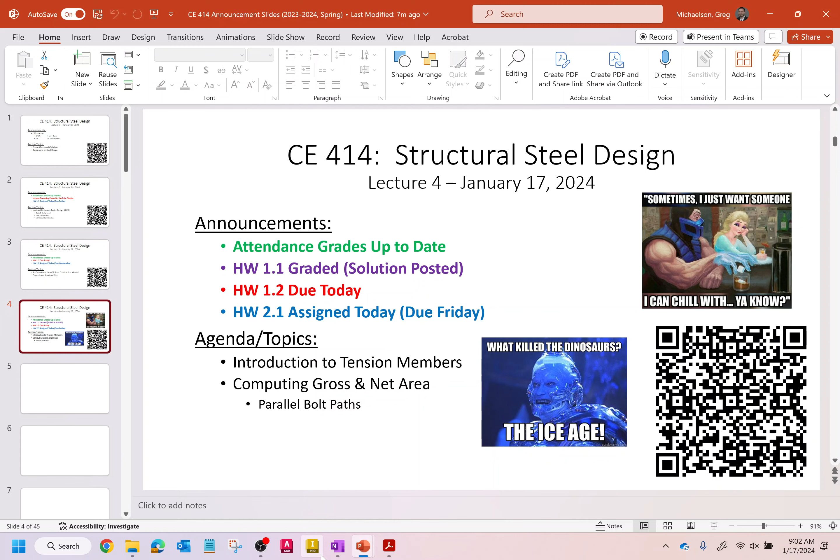But today, what I want to do is actually get into some steel design. Our first real foray into actual steel design begins with tension members. Let me pull this up and let's get started. Our goal for today and the next couple weeks is the assessment of a particular type of member in steel design — namely, any element that is loaded in pure tension, like taking a piece of steel and yanking on it. Where would you find these in the real world? In trusses, in the tension elements of a truss, and in braces in buildings. Those are the two main places you'd find them.

Now, I'll blanketly admit that of common elements in buildings, like beams and columns, tension members are — I don't want to say the least common. I think just about every structure probably has some form of a tension member in it. But there's a reason we're starting with tension members: I want to begin teaching you all the process of design, so we need to start somewhere. Tension members, by their very nature, are fairly easy to design, or at least fairly easy to understand how they're designed. More than that, I want to teach you how to start using the manual. If we started with something like beams or columns, not only would we have to learn how to use the manual, but the math and design process would be trickier. Let's start easy and work our way up. Tension members are a very natural place in steel design to start, so that's where we're going to begin.

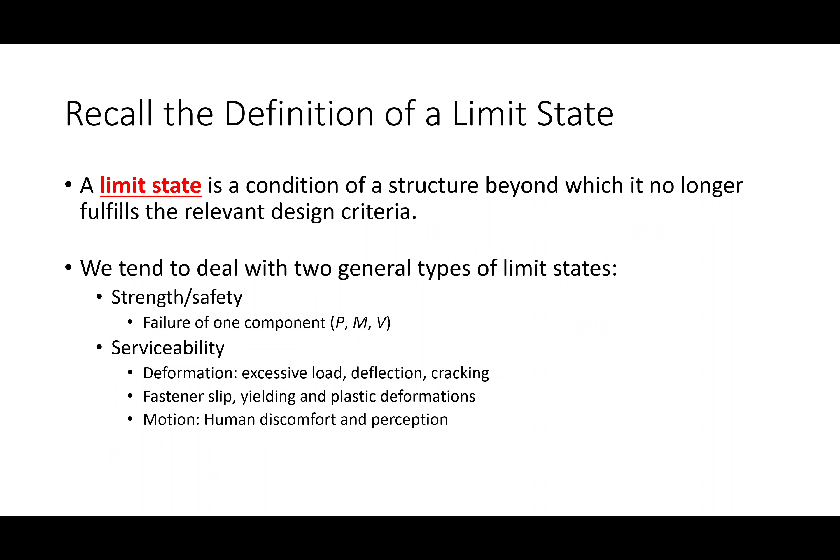That's gross section yielding, net section fracture, and block shear rupture. But we're going to take our time on how to compute those, because there's a lot that goes into the background on how to compute these, and we need to take our time understanding that. So what we're doing is we're looking at members subjected to axial tension. This is our goal for the next couple of weeks.

Again, they are among the most basic type of structural elements. One reason why I say they're basic is the difference between elements in compression and elements in tension: elements in compression have a tendency to be unstable. And elements that are in compression like to do this thing called buckling.

I think you've probably heard that term buckling before, maybe in mechanics of materials, but you have a column, you put load on it, and it gets sort of wobbly, and it suddenly kicks out and deflects. That sudden failure under compressive loads is called buckling. Tension members don't really do that, so the mechanics tend to be a little bit easier from an analysis and design standpoint.

So I'm going to bring everybody up to speed on probably a very fundamental formula that everybody's familiar with: sigma equals P over A. So what is sigma equals P over A? It is the stress that you get from an applied load over a given area.

So you fluid folks think of things in terms of pressures. Solid folks think of things in terms of stresses. But when we're assessing whether or not an element fails, we tend to not originally think in forces — instead of looking at a force, it's a force per unit area.

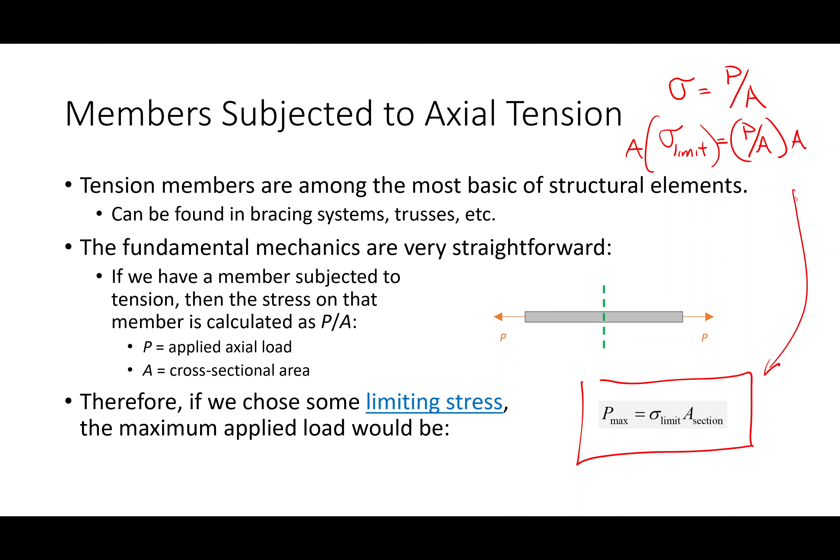But again, I'm really trying to make the point that this is really easy. You have a bar, you limit the stress, it's got some area. The maximum load you can put on that bar is whatever the maximum stress is times whatever the area is. So let's talk about those areas a little bit.

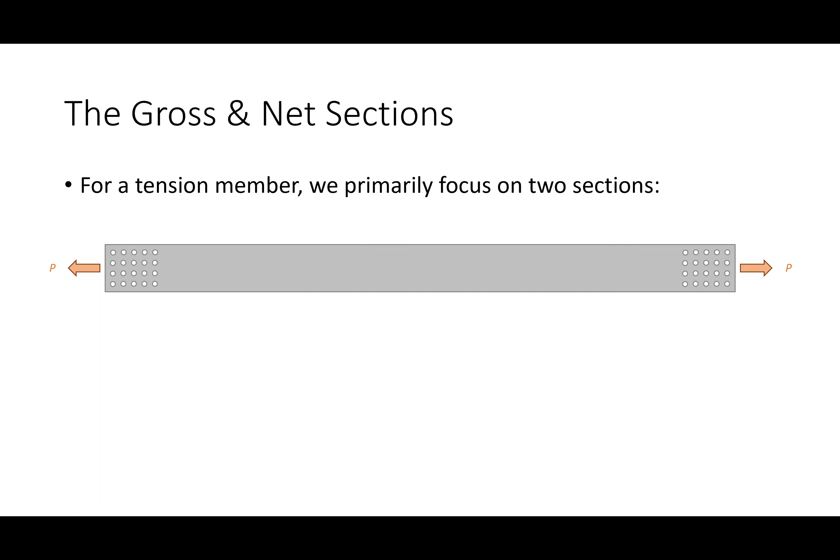Whenever we're looking at a tension member, we tend to focus on really two key areas. Now, you all have heard me say this before, that the secret weapon of structural engineering is a samurai sword or a lightsaber if you happen to be a sci-fi fan. So what we're talking about is important sections through this member for which we limit stresses.

Now, the first section is what we call the gross section. The gross section is just a fancy term for the main body of the member. So if you ever look at any tension member in the real world, you're going to see the ends of the member have some sort of connection to whatever it's connecting to, either through bolts or welds, or if it's an older structure, maybe rivets.

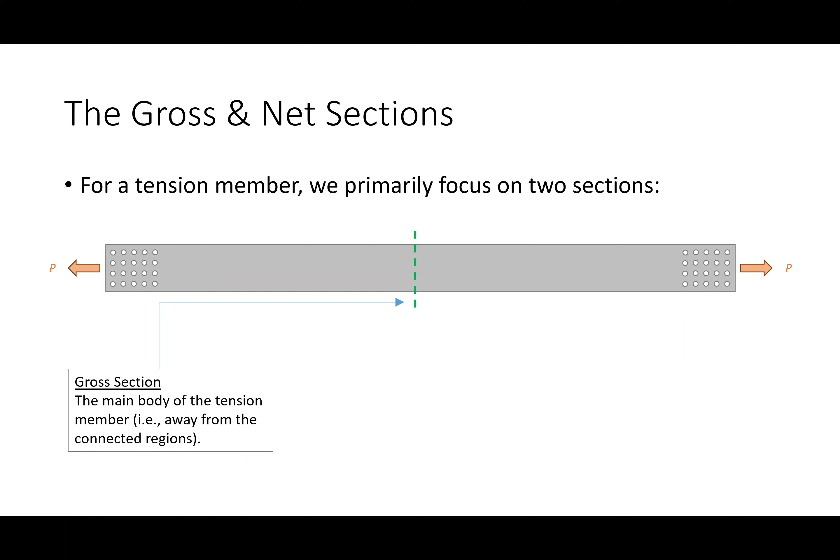We don't really use rivets anymore these days—I'll talk about that when we get into connections later. The ends of the member have bolts or welds, but the main body of the member is pretty prismatic. Any section away from the connections is pretty uniform, and we call that the gross section. The net section is the cross section that passes through the connectors.

A couple notes: I've drawn the net section here on the right. Tension members are usually symmetric, so whatever's going on over here tends to be the same as over here—especially with tension members. In other words, if I evaluate the capacity right here, I don't need to evaluate it again elsewhere. It's all the same.

I've drawn this section through a very particular line—it passes through the lead line of bolts. I'm going to be a little fast and loose with this term today since it won't really affect the connections we look at today. But when we come back Friday and start looking at staggered connections, the lead line will be more important.

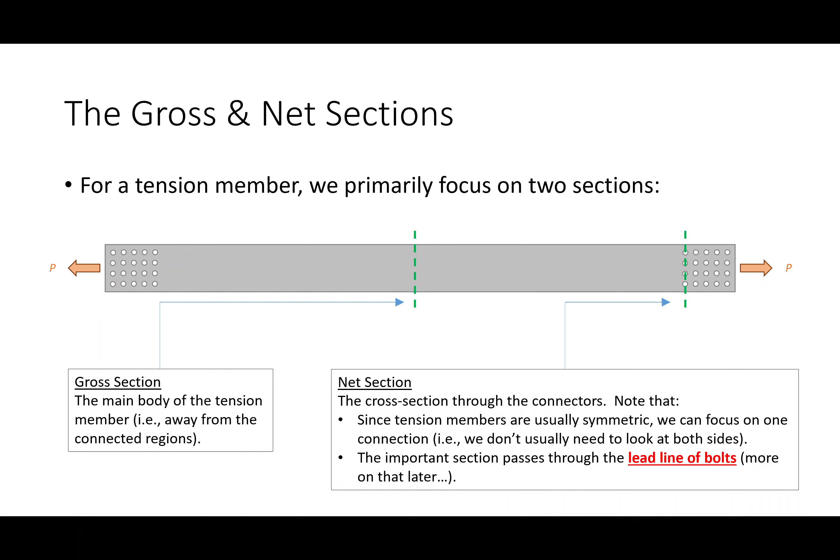I want everybody to open their manual—I know everybody brought their manual today, the big old AISC steel construction manual. Everybody brought their manual, right? I'm looking at the folks who didn't, and I'm just going to point at you.

I want everybody to turn to chapter D. I know some of you might still be waiting on it in the mail. It starts on page 16.1-32. If you don't have your manual with you, try to spy on somebody's next to you.

This is the section of the specification that governs the design of tension members. I think it's worth looking at to get up to speed with how specifications are written and what they look like. It's really easy to wrap your head around—this is a very simple chapter. I've included some snapshots on the slide. Section D begins with an outline of the chapter, then section D1 talks about slenderness limitations, which I'm skipping for now since we'll cover that later.

Let's get into section D2, which tells you how strong your member is. Basically, you can use this to predict how much load a tension member can withstand, and as long as the load is smaller than these numbers, the member is safe. It says the design tensile strength and the allowable tensile strength—the difference between the two is whether you're using LRFD or allowable strength design. These omegas are just factors of safety. Remember, allowable stress design lumps everything into one big factor of safety, while LRFD factors the loads and the resistance separately. So this is what we're going to use.

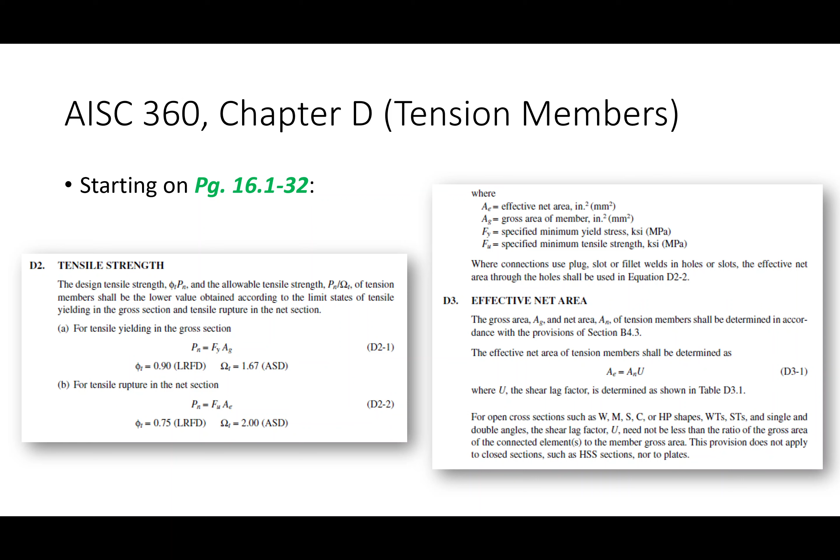So what am I talking about here? I'm going to give you a conceptual formula for gross and net area, and then we're going to refine it later. If you remember, gross area is the main body of the member, and net area is where the connection is. So how do we relate the two?

In general, the net area is the gross area minus however much material you remove because of bolt holes. That's a real simple way of defining it. I'm going to add some more science to this over the next couple of lectures, but in general, this is how you relate gross and net area: the net area is the gross area minus however much material you remove due to the presence of bolt holes.

So for example, if you had a member and you just welded the two together, like maybe with fillet welds, then the net area and the gross area would be equal because you're not taking any material away. Does that make sense? Everybody okay with that?

Now we need a more specific formula, but if we wanted to compute the net area, we need three things. We need the gross area, obviously, because in order to compute the net area we need the gross area minus whatever. We need the thickness through whatever plate material we're going through, and we also need the diameter. Notice how I'm being a little fast and loose with the diameter here. Let me sort of explain.

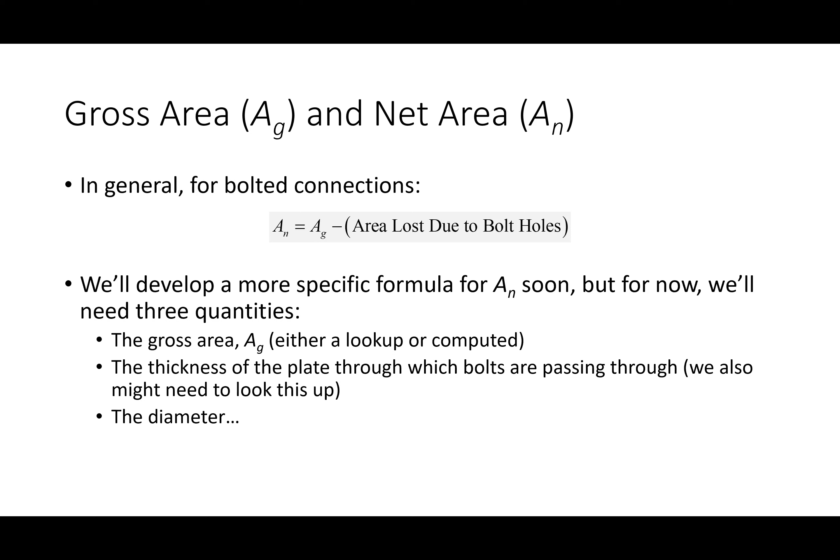Now whenever we compute net area, we're not really interested so much in the bolt diameter as we are the hole diameter. And there is a difference between the bolt diameter and the hole diameter.

How many in here have ever done any work, like in a mechanic setting, worked on your car, your parents' lawnmower, anything like that with a wrench? If you ever try and take a 1/2 inch diameter bolt and stick it through a 1/2 inch diameter hole, it doesn't work. The hole itself actually needs to be drilled slightly larger in order to facilitate fabrication or erection. You have to actually have the hole a little bit larger than the bolt.

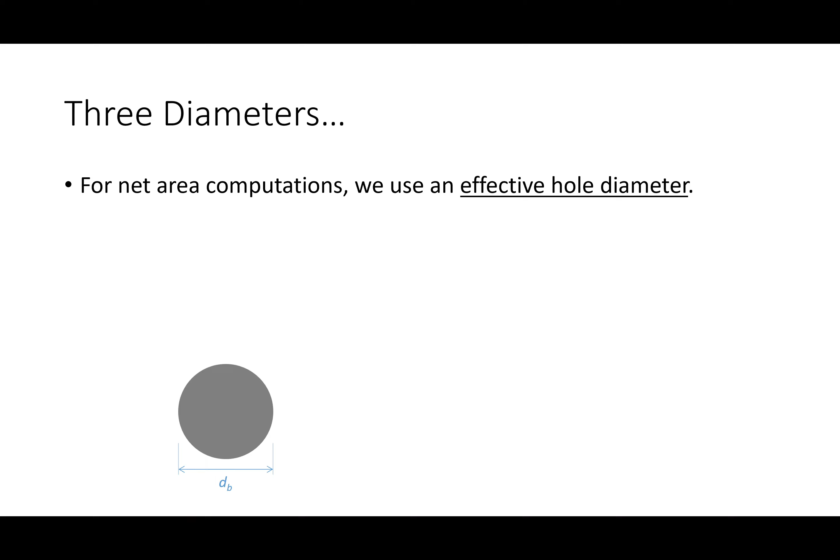So for example, let's say this is a bolt. I'm actually going to drill the hole a little bit larger. Now, that actually comes from a different section in the manual, Chapter J, the section on connections.

Chapter J says that if you have a standard size bolt, standard size hole, for any bolt that's less than 1 inch in diameter, which is most structural bolts that we use in steel design, or at least the most common, we add 1/16 of an inch to the bolt diameter to account for what we call erection tolerance. So erection tolerance basically means that we drill the hole a little bit larger so it can actually put the darn thing together. So if you have a bolt that is 3/4 inches in diameter, you add 1/16 of an inch, and that's your proverbial drill bit that you use to actually drill the hole for a standard size hole.

Now, to this diameter, we then add another 1/16 of an inch to account for the fact that if you've ever seen drilled steel holes, that little bit of material right around where the drill punched through, depending upon how it's drilled, can be a little damaged.

So the idea is that from a net area perspective, we don't count on this little lip of material, this 1/16 of an inch, being effective in transferring load to the rest of the member. So if the bolt diameter is 3/4 of an inch, to get the effective hole diameter, we add 1/8 of an inch to that. We're adding 1/8 because we're adding 1/16 twice: one accounts for drilling the hole larger to facilitate erection, and another 1/16 accounts for the fact that this damaged material isn't effective in transferring load. Does that make sense?

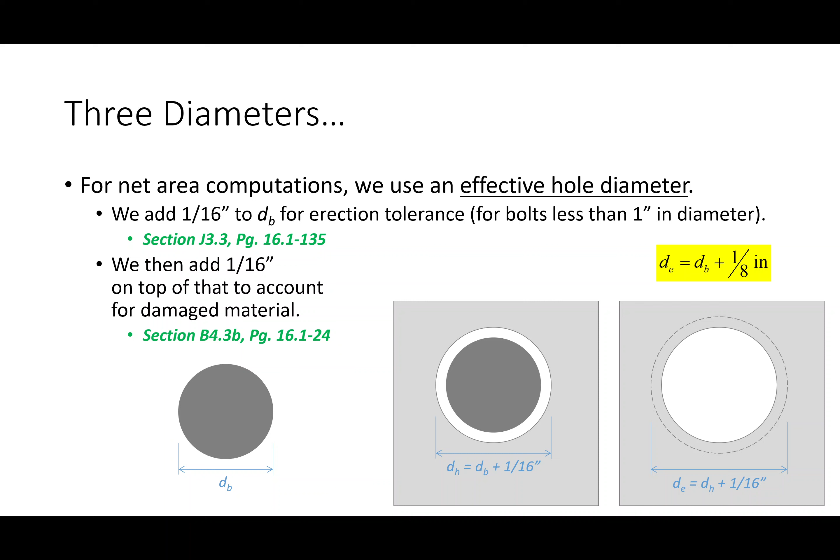So don't worry, we're going to practice this in a bit. We're going to employ this. For us, the effective hole diameter is taking the bolt diameter and adding 1/8 of an inch. So far, so good?

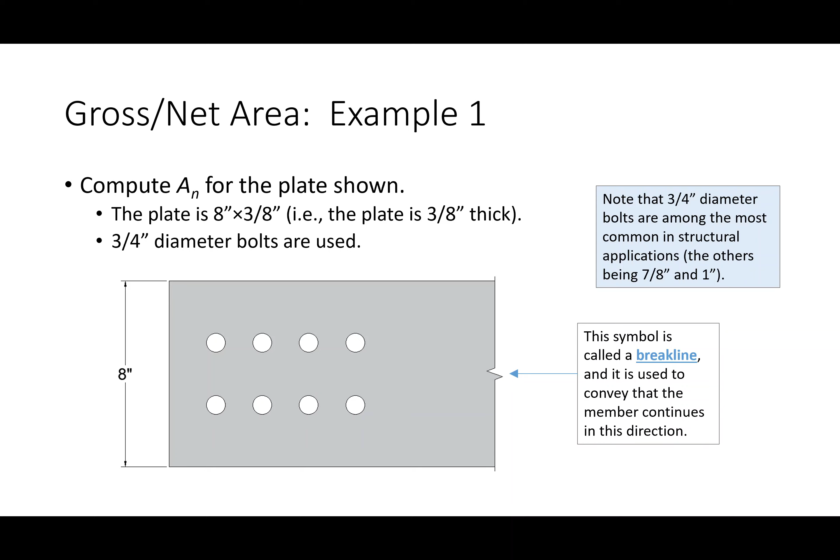I think the best way to go through gross and net area is to just do some problems. So let's do some problems. Let me pull this up here and get my keyboard out of the way. All right, so I have here a problem.

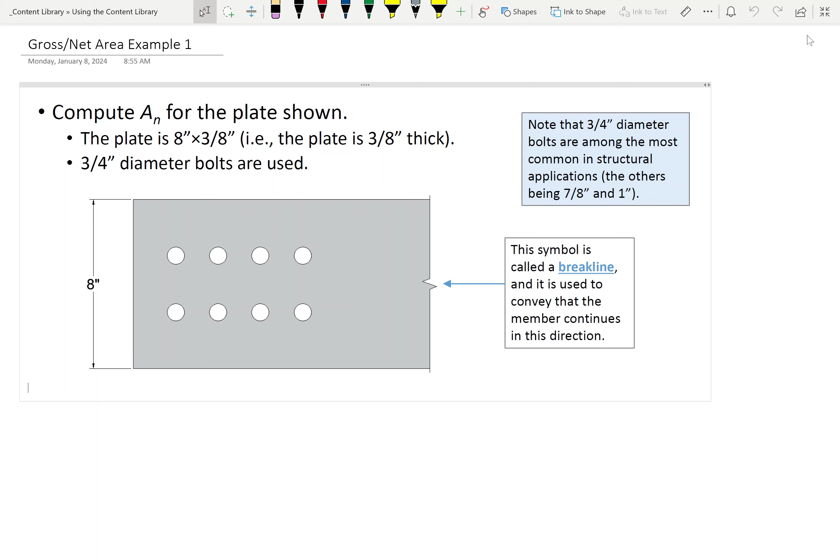We're going to compute the net area for this plate shown. I have some info about the plate: it's 8 inches by 3/8, meaning it's 8 inches wide and 3/8 of an inch thick.

We have 3/4 inch diameter bolts here, and 3/4 inch is the most common structural bolt used in the United States. It is the most ubiquitous, with 7/8 and 1 inch being the others. In building design 3/4 inch shines above and beyond, but in bridges you might see 7/8 and 1 inch more commonly because of the nature of fatigue, where you might need more bolts.

The other thing I'll mention is this little symbol here is called a breakline. Whenever you see this, it means the main body of the member continues this way, so the gross section of the member is out here. While this doesn't really matter for today's examples, it will matter a bit on Friday when we deal with staggered connections. Does that make sense?

So what we're going to focus on is computing the area through this section here. In order to do that, we're going to do a couple of basic computations. Remember, we said that the net area is the gross area minus area lost due to bolts.

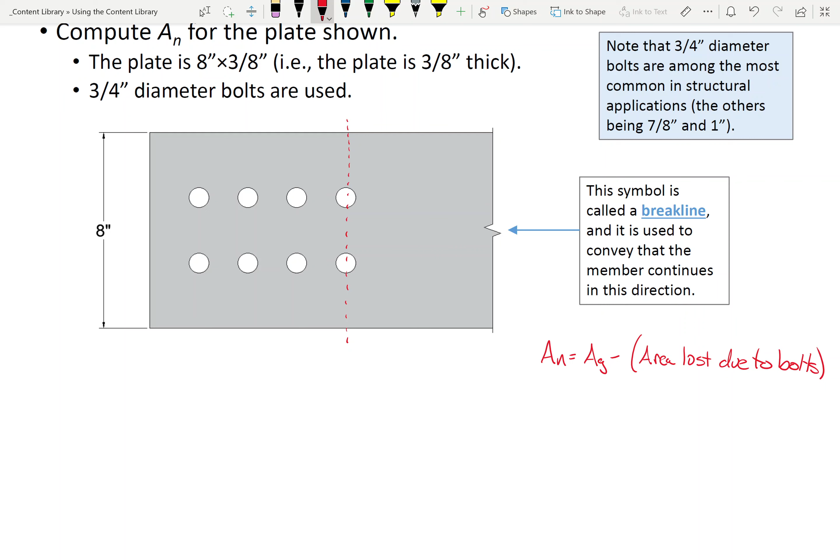And I see here some folks with some calculators, I might need your help on some of these calculations. So the first thing I'm going to do is compute the gross area.

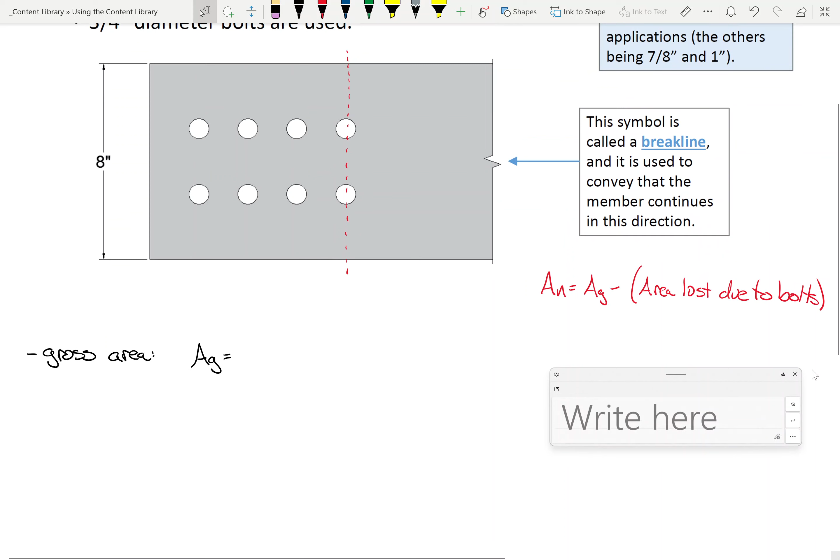So the gross area is pretty easy: A_g equals what? How do I compute the area of this plate? I'm asking you. Let me scroll up a little bit to make sure everybody can see this. So how do I compute the area of this plate if it's 8 by 3/8? I promise it's not a trick question.

What is the area? It's 8 inches wide and 3/8 of an inch thick. Just multiply them, right? So all we're going to say is that this is just 3 inches squared. That should be pretty easy, right? That's not very difficult.

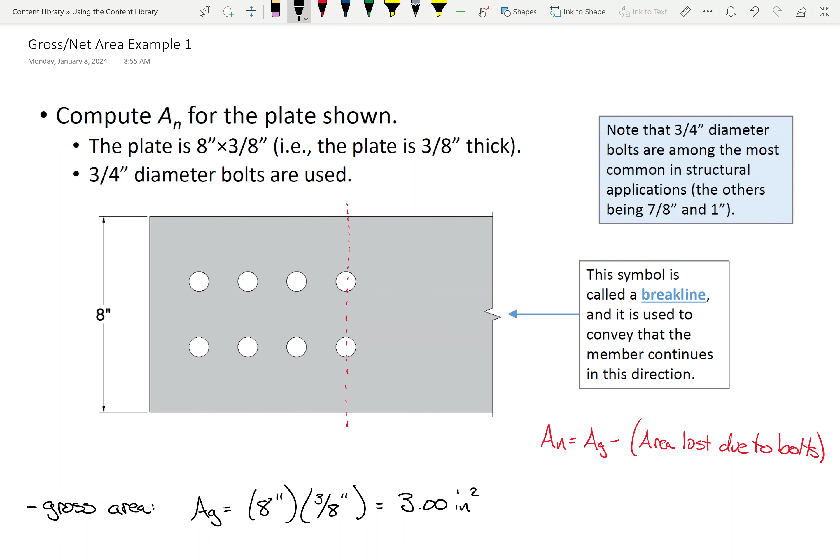Now, before we start talking about net area, let's look at the bolts. We were given that the bolt diameter is 3/4 of an inch. So if that's the case, what's the effective hole diameter? 7/8 — we add 1/8 of an inch. So far, so good? All right.

Now I need to remove the area lost due to the presence of bolts. Here's the kicker: what's the area of a bolt hole? How do I compute that? If I have a bolt diameter, how do I compute the area of that bolt hole?

Okay, a lot of people are thinking pi r squared, right? That's a good guess. That's wrong, okay? And everybody's like, why is that wrong?

Let me explain. What we're doing when we compute gross and net area is we got to think 3D. We're thinking samurai swords or lightsabers, okay? So we are samurai swording through this, and we're looking at the area. If you look at this in 3D, here's what it looks like, something like this.

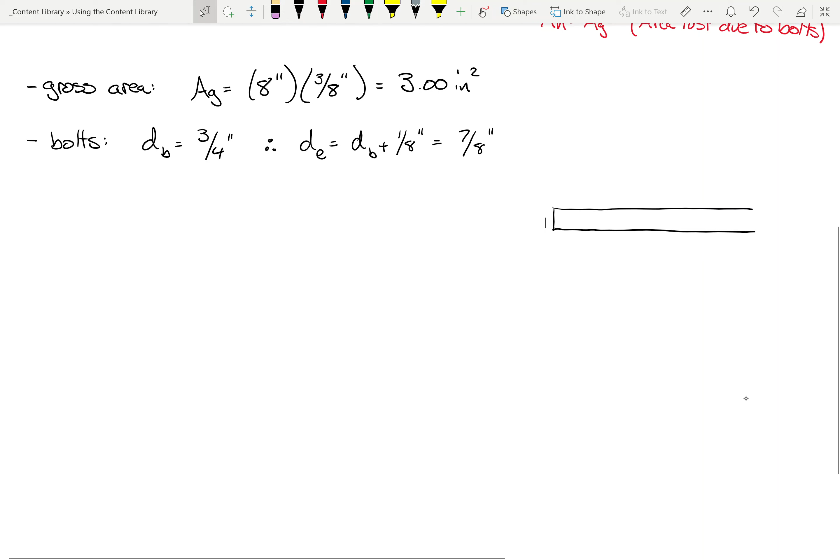So here's our plate, right? And so what we're doing is, here's a hole, here's a hole, here's a hole, here's a hole. And then what we're doing is we're cutting through where those holes are. So the area that we're removing is that, right?

Let's think dimensionally, okay? This dimension here, three-dimensionally, that's 3/8, right? This dimension here is 8 inches.

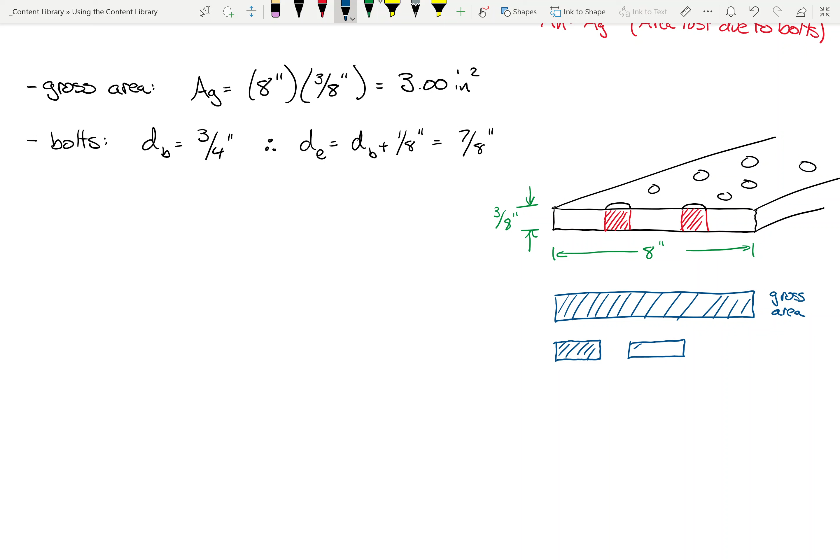Okay, so if I just look at the area of this rectangle, that's the gross area, right? So just to put some pictures to it, like this right here, that's the gross area. But this, that's the net area. And the reason is that what I have done is I have removed these chunks, right?

So my question to you, let's just ask a simple question: how many bolt holes am I removing from the gross area to get to the net area? It's 2. A lot of people, when they first think of this, think, oh, here's the connection, I'm removing 8 bolts because there's 8 bolts. No. It's what's through the section, right? And how many bolts are going through the section is 2.

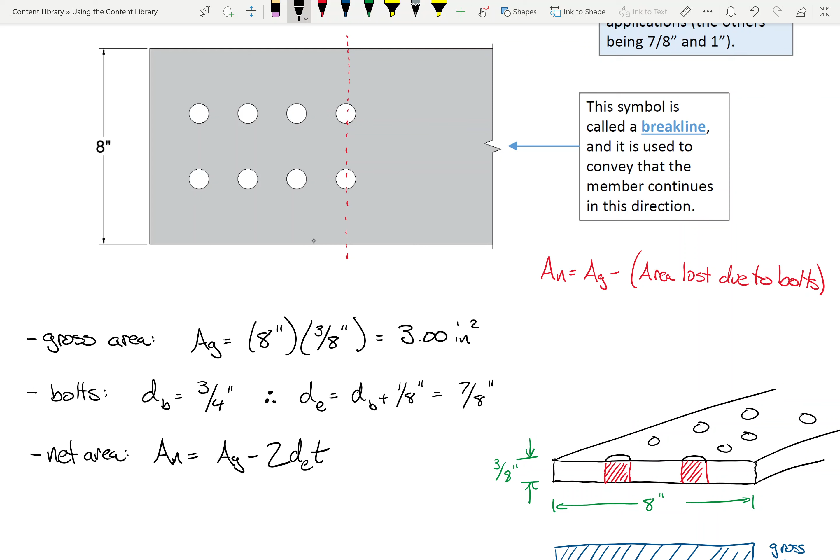Well, let's ignore the numbers. What I'm saying is, it is the diameter times the thickness. That's what I'm saying, right? Is everybody okay with that? So if I wanted to compute the net area, it is 3.00 square inches minus 2 times 7/8 times 3/8. That is the net area.

Anybody have an answer for me on this? That's fine, give me 2 points. 2.34. Do I have a second on that? Okay, so that's the net area.

Does that make sense? That this is how we would compute the gross and net area. Again, we're starting basic, we're starting easy, okay? I don't want this to be very challenging. I want this to be easy.

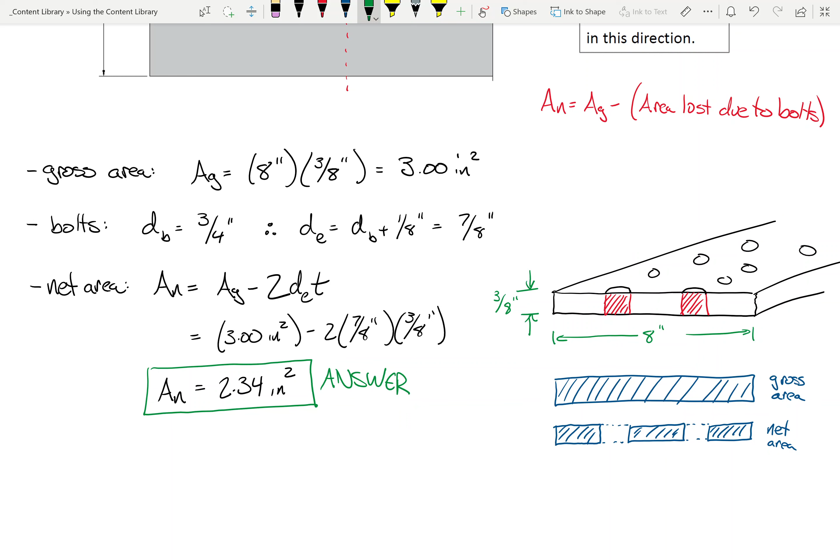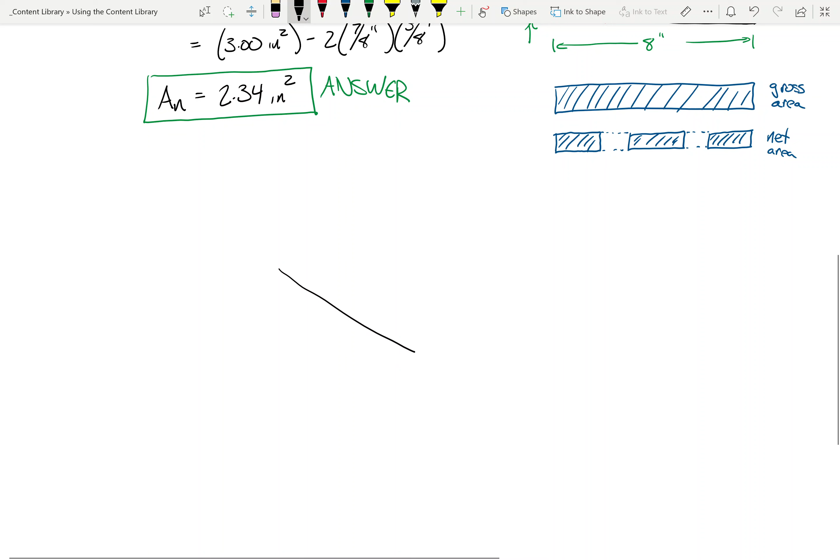Yes, sir? So are you not saying that's like a cylinder? Here's what I'm saying. Let me try it this way. So it is true that if you look at a main hole right here, in order to remove, from a volume perspective, you're removing a cylinder of material to get that out. I'm not disputing that.

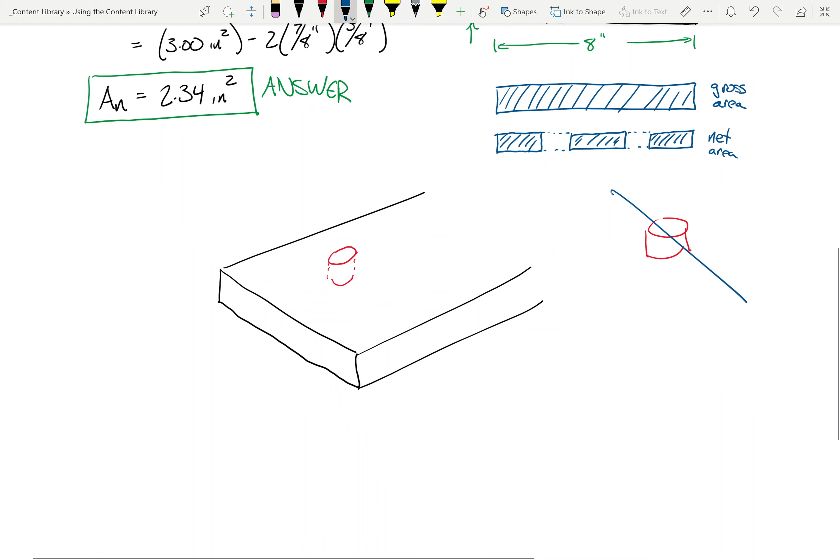What I'm saying though is that if you take that cylinder, and you cut right through the middle of it, a plane right through the middle, you're going to see that rectangle with the diameter and the thickness. That's what I'm saying. Does that make sense to everybody else? This is good stuff, I like this. Any other questions?

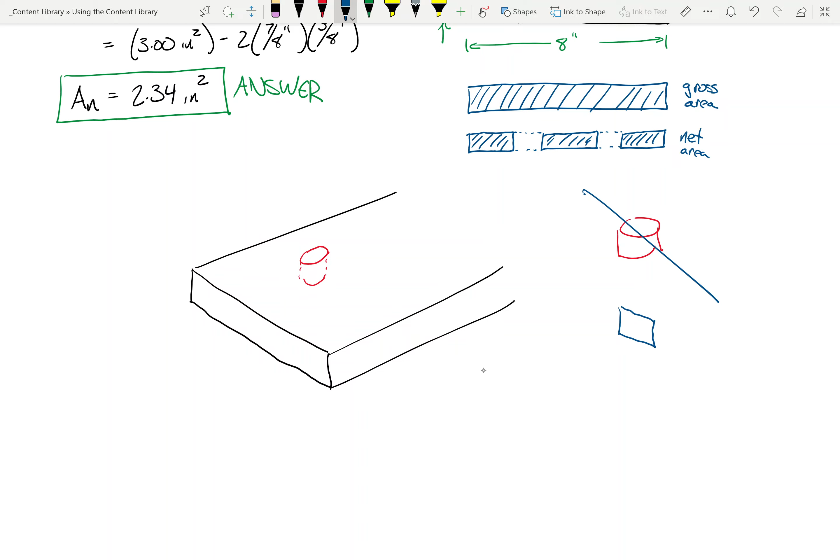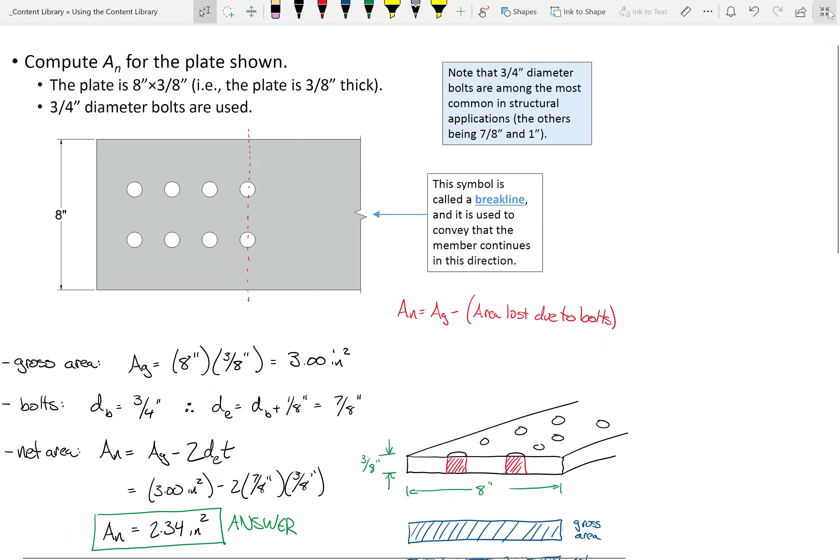All right, well if that's the case, now I want to take this problem and ratchet it up just a bit, okay? Now let's take this problem and let's do the next one. So the next one is I want to compute the net area for a W10 by 49.

I have given you a little bit more of an isometric view, maybe one that's a little bit more in perspective so you can see it more graphically. But we have here a W10 by 49. I have also given you 3/4 inch diameter bolts on this problem as well. So let's conceptualize this. In order to compute the net area for a W10 by 49, what is the first thing that we need?

The thickness of a W10 by 49. Well, in general, how do we compute net area? The net area is what minus what? The gross area, we need the gross area. What is the gross area of a W10 by 49? And how do you get that? You look it up. There we go.

So we go to the very beginning. This is sort of the purpose: we break out that AISC 16th edition steel construction manual. We open it up to the very first section, so we're in table 1-1. Okay, table 1-1 in the very beginning. So let's look up gross area.

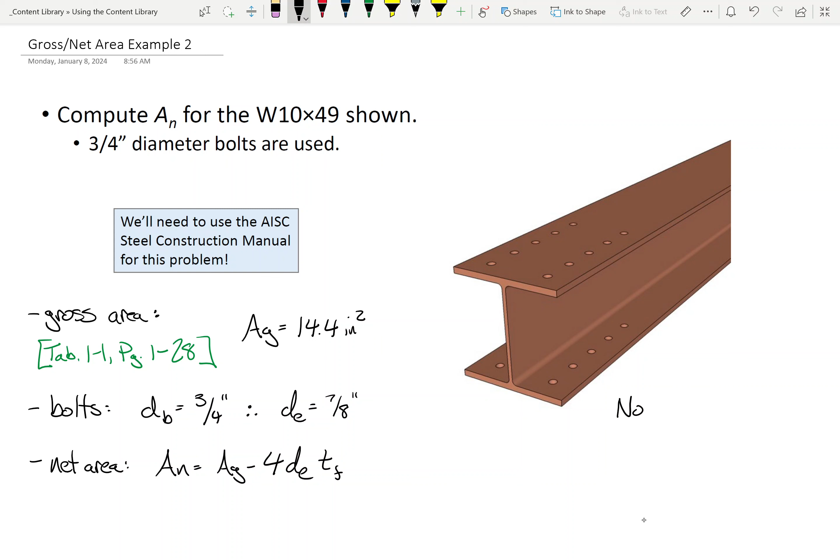So somebody said, what was it? 0.56? 0.56. Somebody else said 9/16. Does anybody remember the difference between these two numbers? Why does the manual list 2? One is actually rounding up. Well, rounding up, but why is it there? For drawing, for detailing, for drawings, for AutoCAD. These are design values, these are drafting values. Do not use these for design. Always use the decimal values. Always.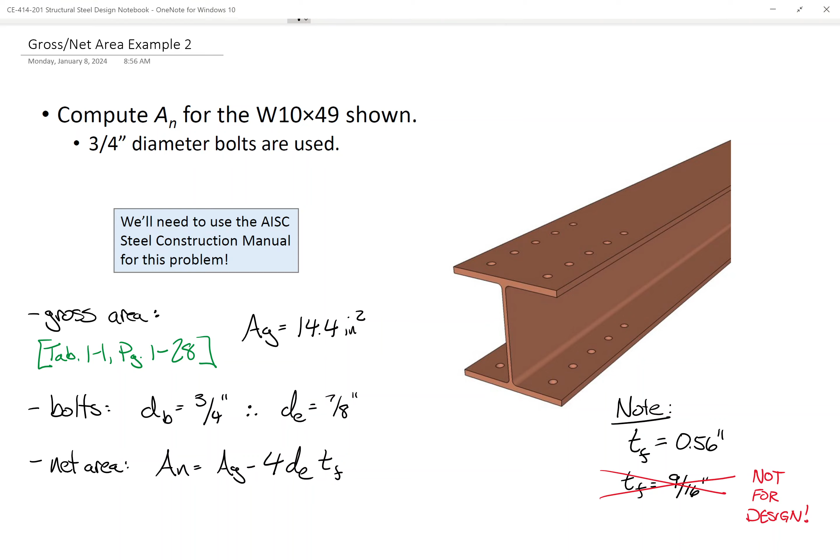So therefore, we get this. And what is the net area at this point? Say it again. 12.44 square inches. Do I have a second? Yes, there we go. All right.

Boom, that's it. That's basically net area in a nutshell. Okay.

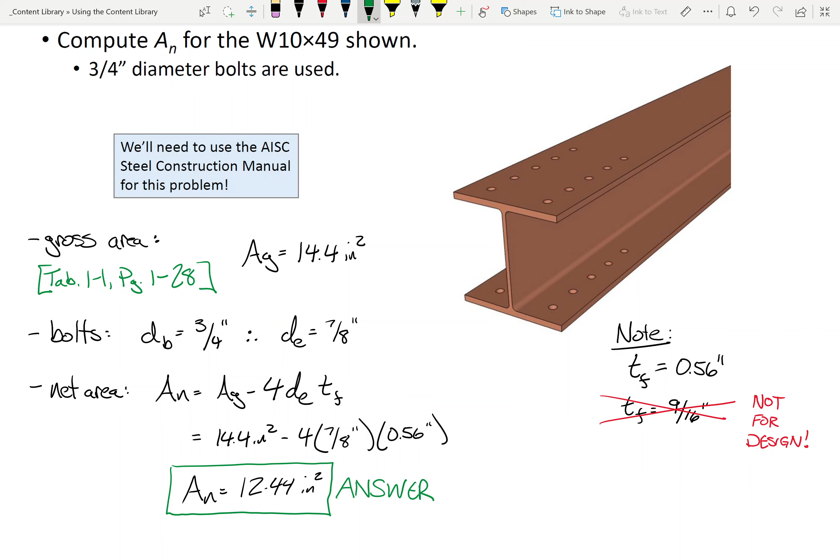Let me correct that. I've got a little wrinkle I'm going to throw into the mix on Friday, and I'm going to at least introduce that wrinkle so that you kind of understand it. Okay, before I move on, does anybody have any questions about this?

Okay, so I want to mention two things. Right now, I would say this is a fair mathematical expression for computing net area. Is that a fair statement? That really what we're doing is we're taking the gross area minus the sum of the diameters times the thicknesses. Okay, now this is so far. What we're going to do on Friday is we're going to change this up a little bit, and we're going to sum up the sum of what are called stagger factors. And I'll show you why here in a second, but this is going to come up on Friday. This is not going to come up on your homework assignment, which is due Friday.

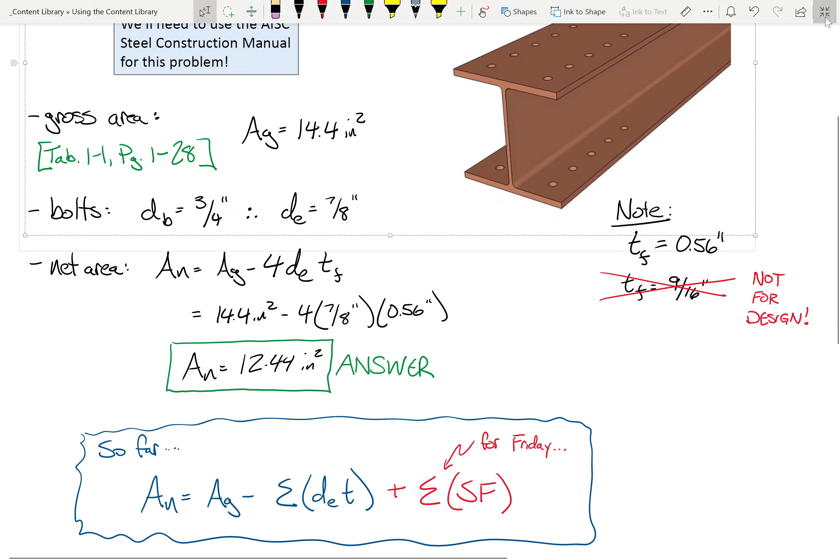Your homework assignment is going to be very, very brief. Can I go ahead and jump away from this real quick? Okay, so let me jump away from this real quick and let me at least show your homework. So this is going to be your homework assignment, due Friday, and I'm giving you two shapes, okay.

So I'm giving you a WT and another W section, and I'm having you compute the net area of each. Now on this assignment, I know some of you might still be waiting on your manual in the mail, so I went ahead and gave you the dimensions on this one.

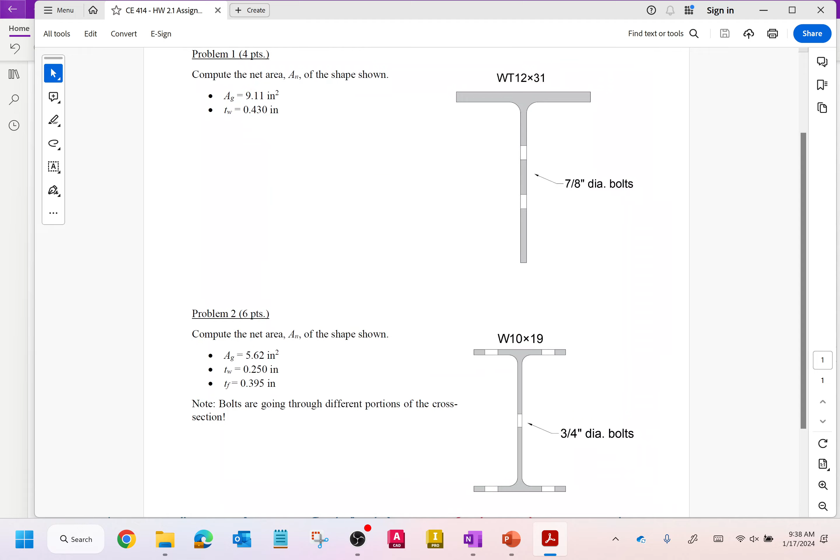Sound good? Okay, now let me show you a little bit about the challenge we're going to have to deal with, starting on Friday, and then we'll call it a bit early today.

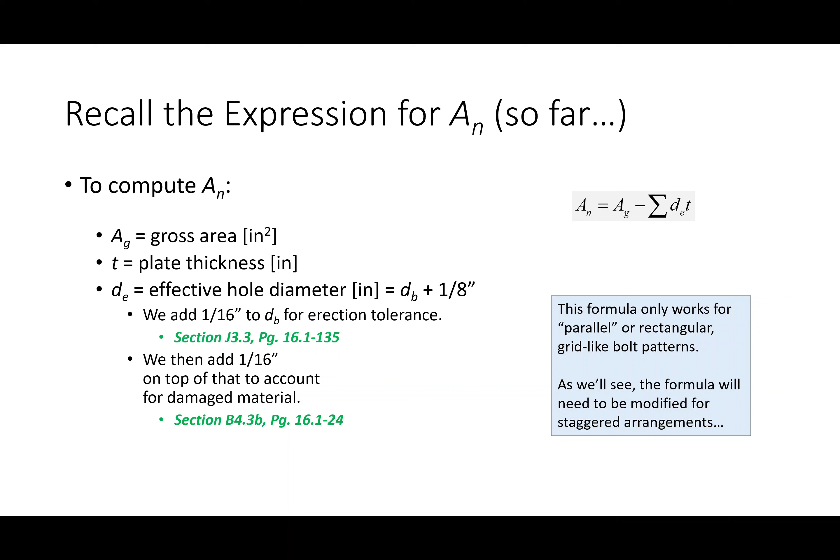So right now, this is our expression for net area: the gross area minus the sum of the hole diameters. One of the things I put in my lecture today is that this lecture is for parallel grid arrangements, or parallel bolt arrangements, kind of like a grid.

In other words, this formula works very well if your bolts are arranged like this. But what if your bolts are arranged like this, in this staggered pattern? Before we get into what happens if your bolts are staggered, maybe a more fundamental question is that we engineers try to keep things as simple as possible. So why would we decide to take bolts and start staggering them up like this? Why make things complicated?

Well, the reason why we do this is essentially to increase the net area. If you are changing the path along which these elements fracture, you can increase the area along the net section.

So let's follow that thought through. What happens if you increase the area? If the nominal capacity is some limiting stress times the effective net area, that's the strength. And if I take the area and increase it, what happens to the strength of the member? It increases as well.

So if I need to design a tension member for 200 kips, and I have a given member, I can increase the area without actually changing the member itself. In other words, I can get more strength out of that member without any additional hit on my wallet — I don't have to make the member beefier and buy more steel. So I can get a more economical design by just taking the bolts and moving them around a little bit. We engineers don't make things complicated just for the sake of making things complicated — if we're going to do it, there's a reason for doing it.

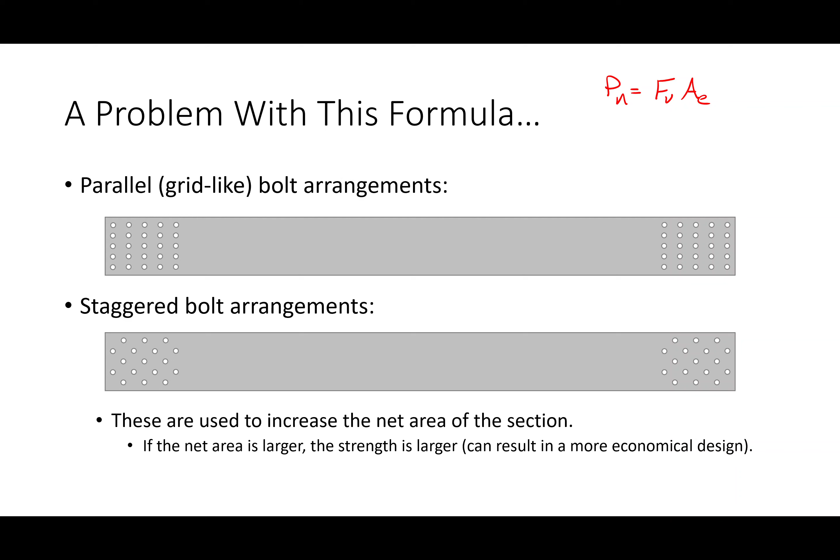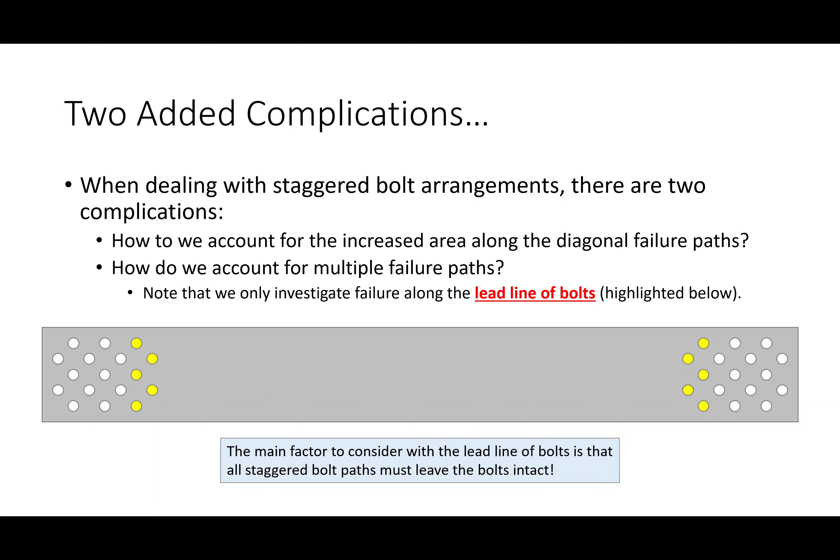Does that make sense? Now the problem is that if you do this, you end up getting different diagonal failure paths. We'll talk more on Friday about the lead line of bolts and so on, but the long story short is that with staggered connections, you could have different ways the element can fail. So we add stagger factors to account for all the potential diagonal bolt paths. I'm not going to worry about that today.

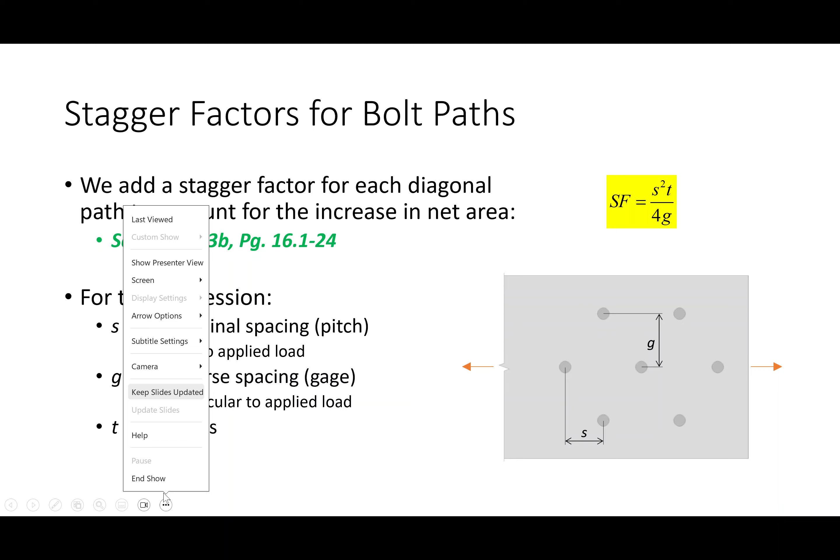This is totally a topic of discussion for Friday. But I wanted to illustrate the idea that this is coming — that we're going to be adding a stagger factor for every diagonal failure path. I don't want to go too far down the rabbit hole of this, because I want you to have a solid foundation on just parallel connections.

So I've got a homework assignment for you that basically regurgitates what we did in class today. That'll be due on Friday, and then on Friday we'll start handling this stuff — I don't want to say it's a little bit more challenging, but there's just a little bit more to identify and observe.